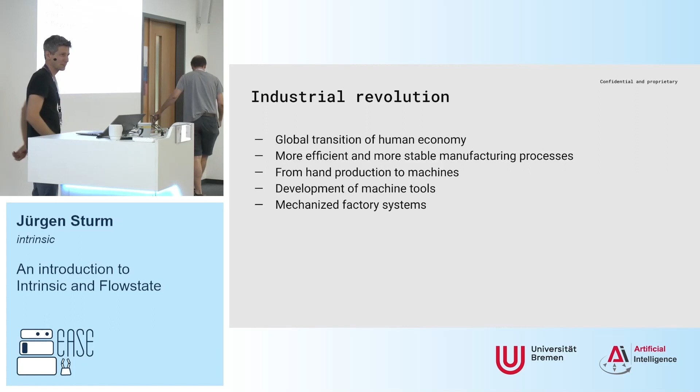Of course, this is not something that has just happened recently, but this has been going on for several centuries, and it's called the Industrial Revolution. I thought for the first few minutes we could take a deeper look at that, with the aim to understand what technological breakthroughs have enabled that, and what we can potentially learn for the next breakthrough to come.

So, of course, Industrial Revolution has happened everywhere. It is a global transformation from hand labor to machine production. But not only that—also research on manufacturing processes themselves, making them more efficient, plus the development of better tools, which made it possible to produce products at scale and at a significantly lower price, so that these products then became accessible to everyone, or to the masses.

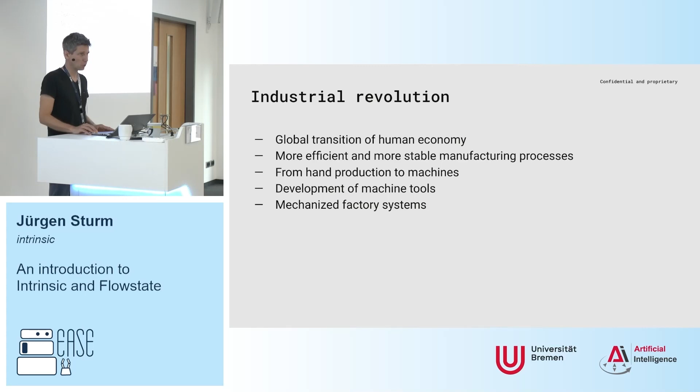And with that, manufacturing is actually, if you look at the worldwide economy, one of the big sectors of economy. There is of course also housing, food and health and so on, but manufacturing itself is actually making up for much of human economy these days.

And if you look more closely, Industrial Revolution is considered to have happened in stages, or you can identify various stages. It started all with essentially the steam engine, and suddenly having access to mechanical power that people could use to drive machines—before, everything had to be hand labor or animal labor. And that enabled, for example, that the textile industry was able to produce at scale, textiles that were very expensive before, and then made it accessible to everyone.

But also technological advancements in general, like, for example, iron production got massively cheaper during this period, which then formed the basis for the second industrial revolution, where the availability of iron and other goods enabled, and also led to, the invention of the railway in the first place. The availability of iron and other things made it possible that these things could be manufactured again at scale, so everyone could actually benefit from it.

Also, gas and water supply systems got introduced. Electrification started to happen during the second industrial revolution, and this enabled people to move between cities. And through the invention of the telegraph system, ideas were able to be quickly exchanged.

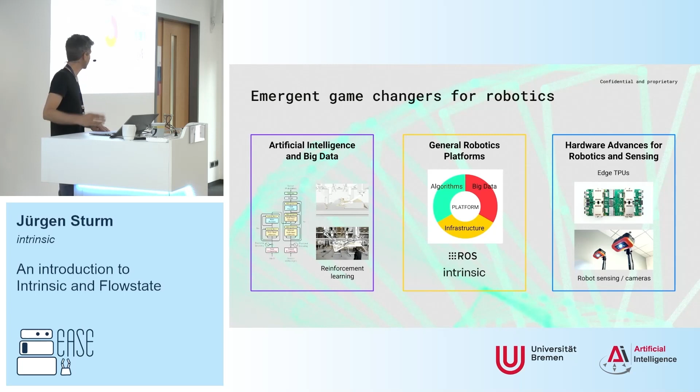And this is why Intrinsic was created with the goal to make industrial robotics better accessible for people and for businesses who previously did not have access to it, simply because of the complexity and the background knowledge that you have. You really have to distinguish this now mentally from you, because you're all robotics researchers, right? You know how to get this stuff done, but the majority of people in the production sector actually do not know. And for them, it is impossible or extremely expensive to actually make use of that.

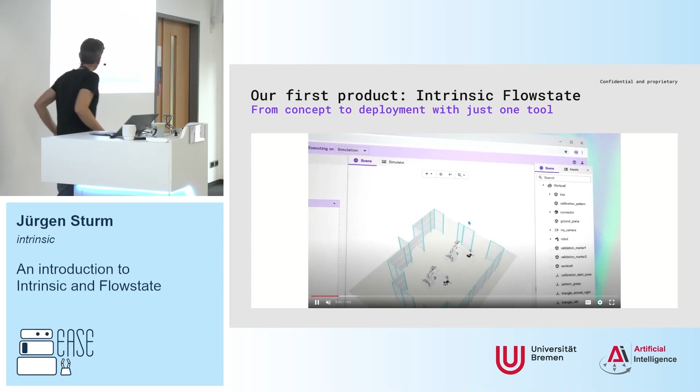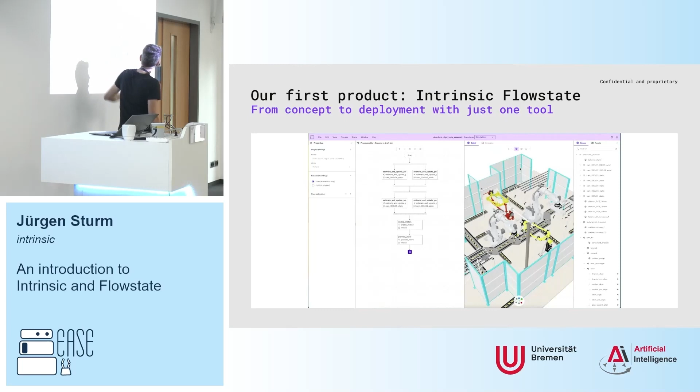Earlier this year, we introduced Intrinsic Flowstate. Flowstate is the first product that we've announced that is built on top of the Intrinsic stack. This is a web-based application that allows users - and this is really not for programmers, this is for users of robotics technology - to design a work cell in 3D. This is really about industrial static production work cells, and to program it using a graphical user interface.

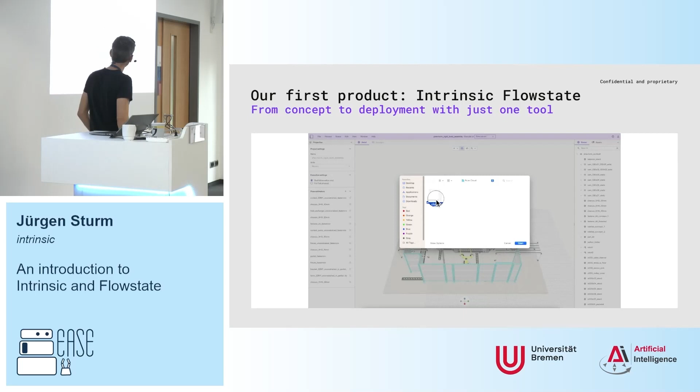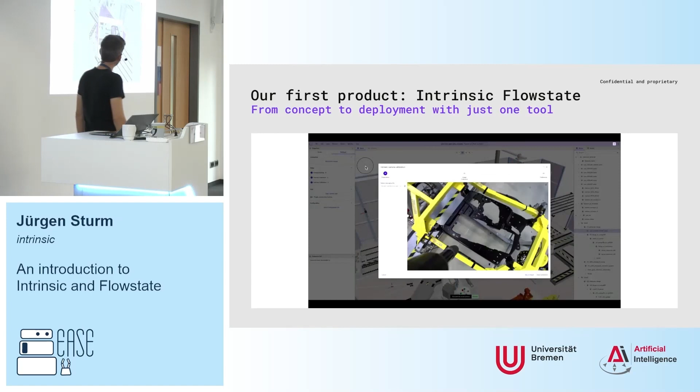And I'll show you more in the remainder of this talk of how this is put together, and how this can be used. But it's also important to keep in mind that this is just one of the outlets that you can do when you build on top of the Intrinsic stack. But we're targeting initially people who have a need for automation technology, but who are not necessarily robotics experts.

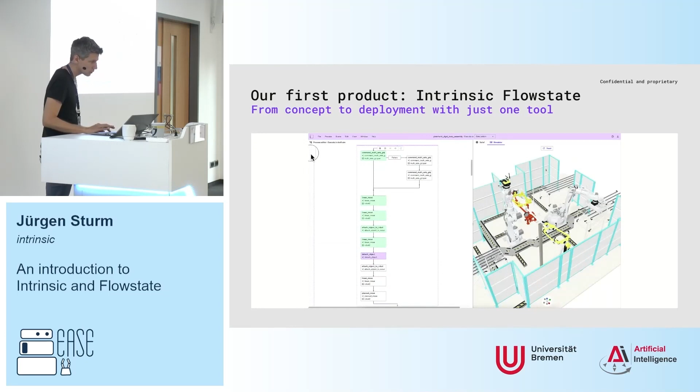Cool. So, let me continue. Good.

Our platform has different aspects that went into its design. We're really trying to build a platform for the next generation of application developers. At the moment, robotics is mostly restricted to people with a robotics background. With this platform, we're hoping to make it accessible for people who don't necessarily have that, or who have been developing other things in software engineering but not this deep robotics hardware or tech background.

Second, we're planning to make robotics and AI accessible, and this is where we believe we need your help. There are many really good algorithms that would theoretically be there, but in practice the rest of the world cannot yet use them because it's too difficult to set up, deploy, and adapt to the problem you actually have. Even if you're able to grasp a cup and put it in the dishwasher with a robot, that doesn't mean someone else with a robot who has the problem of packaging cups in a basket could actually do the same.

Third problem, I guess all of us have experienced this: making hardware, specifically robotics hardware, better interoperable. It's always a pain when you add a new sensor or piece of automation equipment to actually connect to it and use it in your application. We're building on top of existing standards, but simply by pulling it together and making this more accessible will hopefully make life easier for everyone.

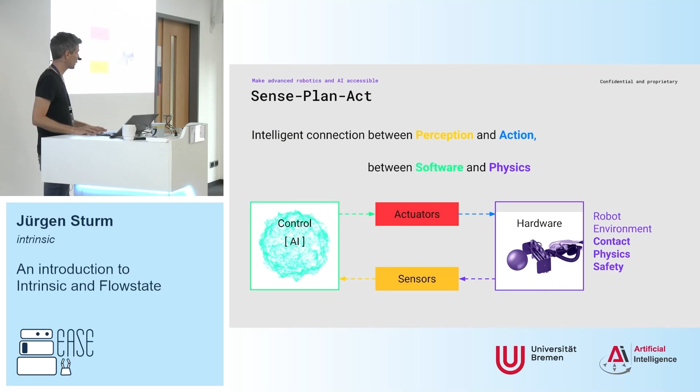We've seen this before. No matter how you think about it, typically there's this sense, plan, act loop. The skill sits on the control side, but is interacting with the hardware or potentially simulated hardware. Because it's hardware, the robot has to deal with the real environment around it. This also means it has to deal with contact situations because we want to move or change the world. Physics plays an important role, also modeling physics correctly, and of course dealing with safety problems, especially when you're putting it into production use.

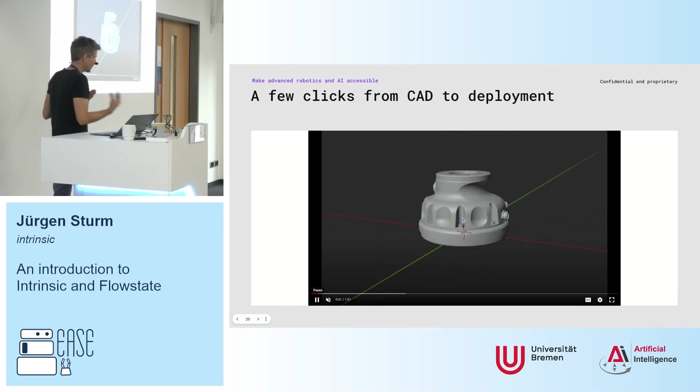Let's first look at the sensing part and one particular skill that we're shipping with: pose estimation. As I said, there are plenty of computer vision algorithms that would be suitable. This one is actually for mono RGB cameras.

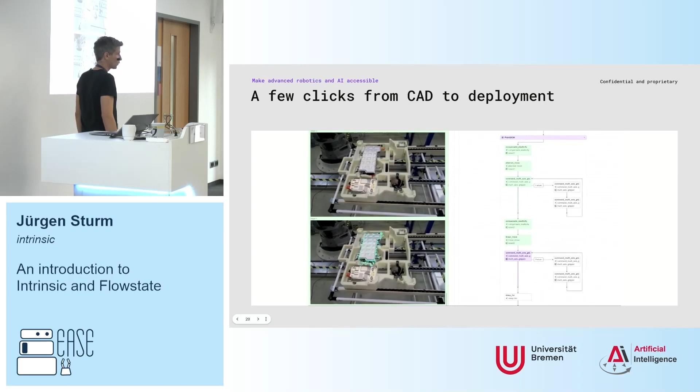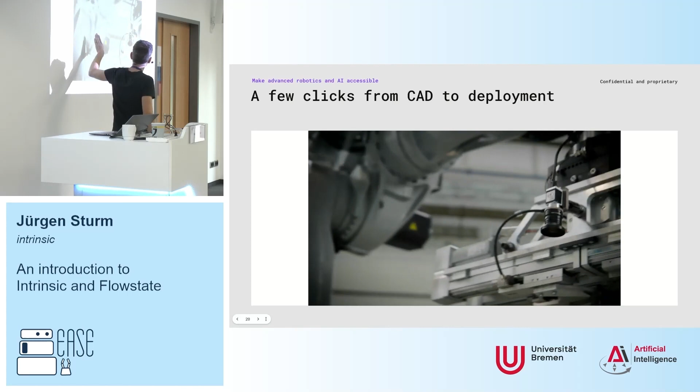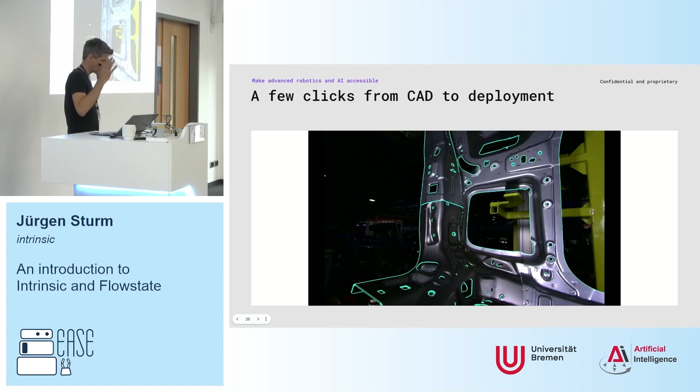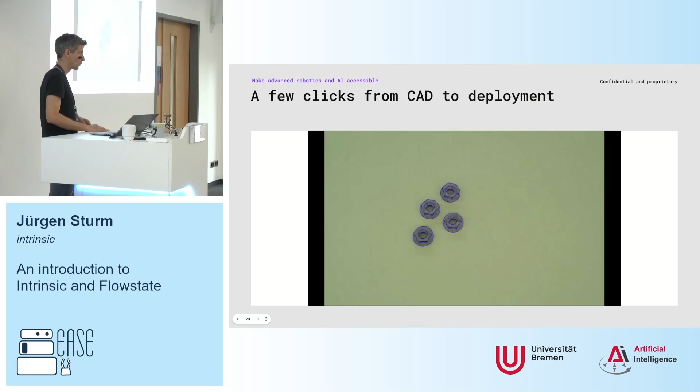The user starts with a known CAD model. In our web interface, a user can upload a CAD model of a particular part that you're interested in, that you need for your production process. We use a typical industrial camera, in this case connected through an Ethernet interface, GenICam compatible. Then in our UI, you can configure a pose estimator. You specify, for example, what the expected pose of the object is, what range of orientations you want to train your pose estimator for. You kick training off, and then it trains in the cloud or locally, depending on what algorithm you choose. Once this is ready, you can use it in your process, and you can also train multiple pose estimators depending on how many parts or situations you have.

For your use cases. Oops.

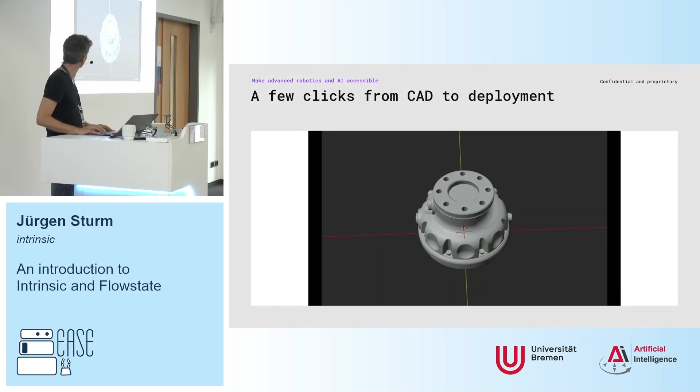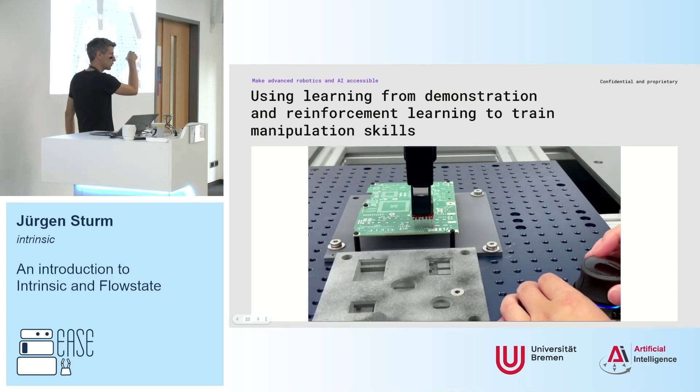So on the actuator side, here we have a use case on PCB assembly. This is a PCB board into which we want the robot to insert particular components. This is one of the things that is difficult to automate today, because this insertion you typically don't get right, even if you're using computer vision to perfectly sense the pose of the piece, because picking it up and then putting it on a PCB board, you will never exactly hit the holes. So you need some strategy for properly inserting it.

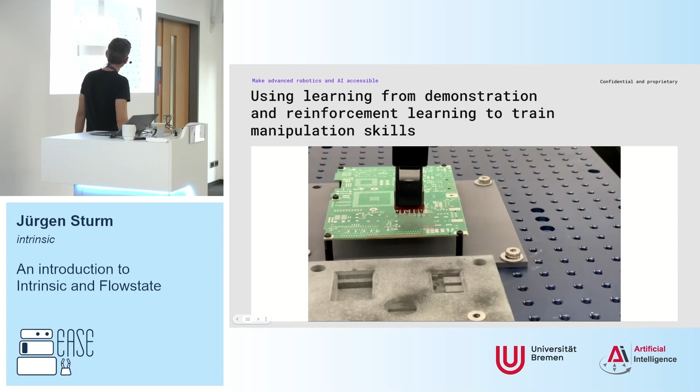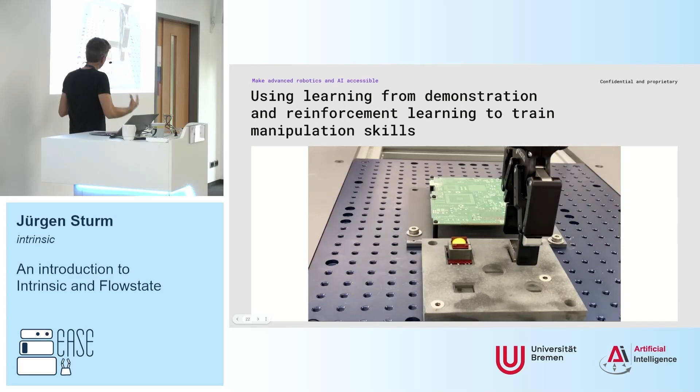The approach here is that a human is actually providing some demonstrations using a space mouse, and then the robot uses that as a starting point for reinforcement learning to actually learn a policy that has a very high likelihood of succeeding. You can see from the video that during training it may actually destroy a few PCB boards. But then once training has succeeded, the robot is very soft, gentle to the boards afterwards. Because it's packaged in a skill, this makes it easy for people who don't know about reinforcement learning to automate automation problems like that. This is something that hasn't been possible before.

Good. Then the next aspect is making hardware interoperable. For that, maybe first to start with, we call every piece of hardware a resource. So every piece of automation equipment is essentially one resource in the Intrinsic speak. A resource typically is a software service, which may correspond to a hardware driver or controller. And we already provide a number of resources, supported hardware you could say, in a catalog for particular robot manipulators, grippers, cameras and so on, but this is of course also something that will grow over time.

We also provide an extensible real-time control framework that allows you to not only have a hardware driver, but a hardware driver that is actually in a tight real-time loop with other real-time hardware drivers, like when you're dealing with robot control and a gripper, so that both of them can be synchronously used. Of course, this is not needed for every type of resource, but for two manipulators that you want to control simultaneously, you of course want to make sure that not one of them is actually hanging. This real-time control framework is using a hardware abstraction layer that allows you to integrate with existing interfaces to your hardware.

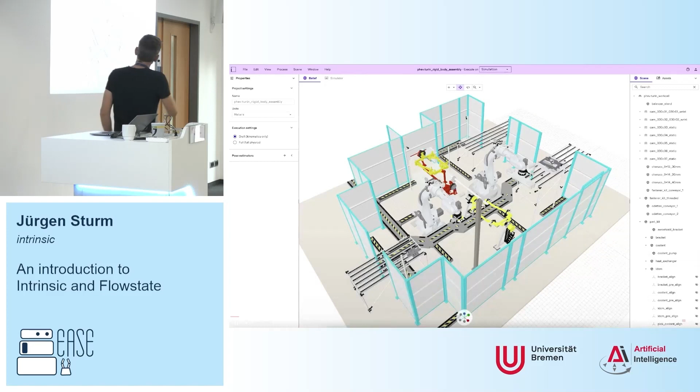If this loads... So this is the standard web interface that people see after they log in. Let's see, where is my mouse pointer? So you have the work cell design. This is already a quite elaborate work cell, as you can imagine. In the easiest case, you would just have one robot arm with a gripper on it, and on the left-hand side you see the process.

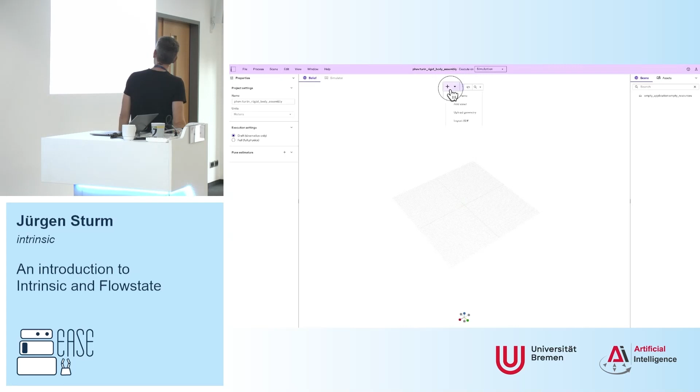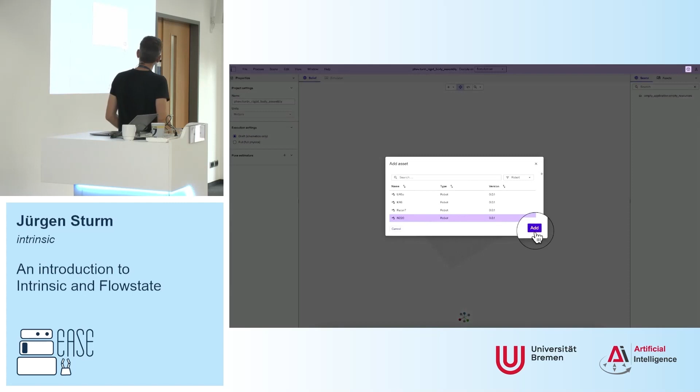Then this brings up this 3D workcell editor, where you might have initially nothing, and then you start uploading your own geometry of your workpieces or the things you want to manipulate. You add assets, which are the resources you saw earlier. You can add different types of robots, different grippers to your workcell. It's important that a resource actually brings all the parts needed for controlling it: the hardware driver, the sim driver, the geometry, and the configuration, so that it can fully work in simulation but then also on real hardware.

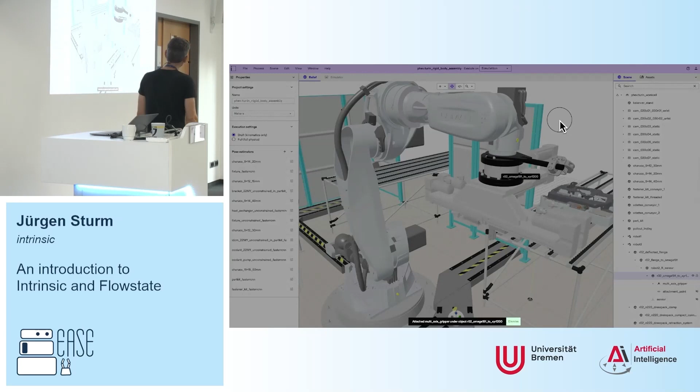Once you put everything into your scene, you have the scene tree on the right side, where you can reparent objects, drag and drop, for example, so that the gripper is mounted to the flange of the robot. So you connect all your pieces. And then when you're happy, you can actually come up with big scenes.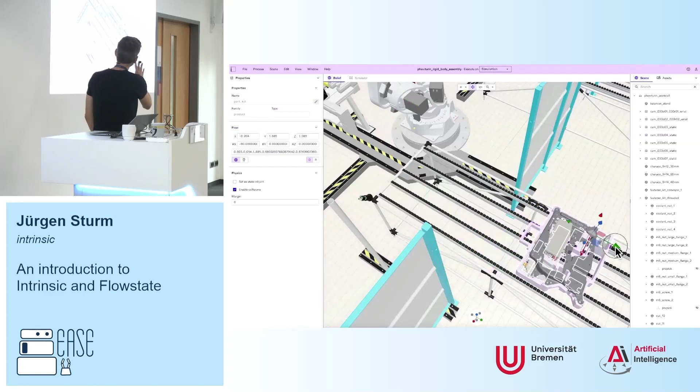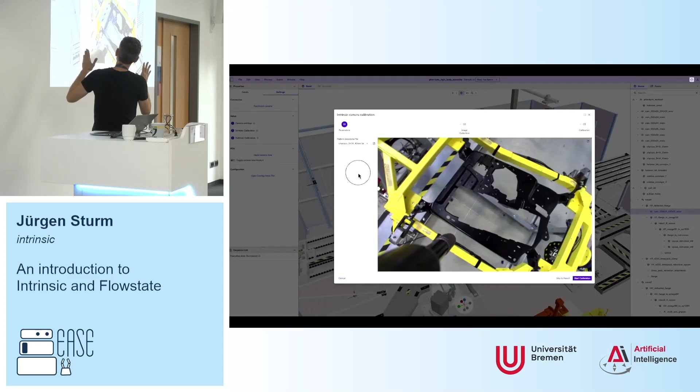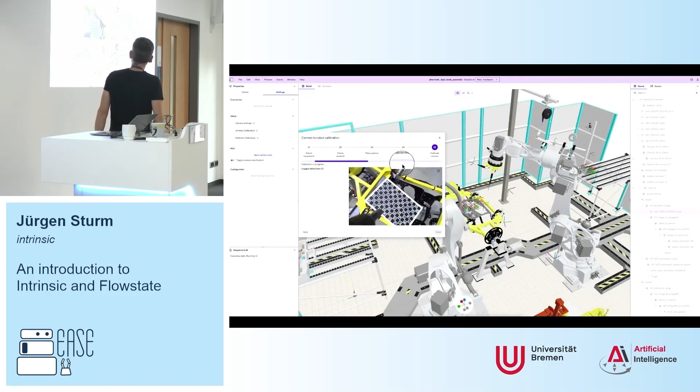Then for every piece of equipment, you can actually, on the left side, see a properties panel where you can change the configuration. For example, for a camera, you can overlay a camera frustum just to see what the camera sees. You can start camera calibration or type in the calibration parameters yourself, depending on where you're getting them from. But we do have integrated wizards for intrinsic and extrinsic calibration.

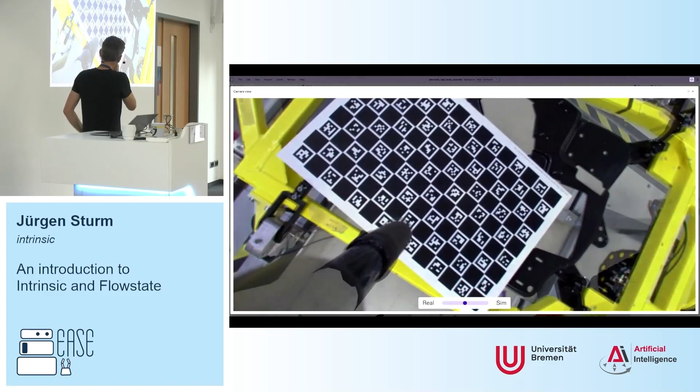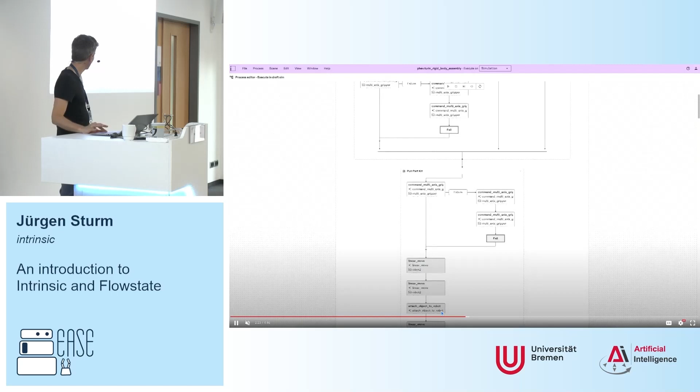Intrinsic calibration is for internal parameters, and then robot-to-camera calibration if you have a hand-mounted camera, for example, or a static camera that you want to calibrate with respect to a robot. This is super useful because I assume everyone who's worked with ROS and cameras has used this before. You get an overlay between the real world and your digital twin, so you can verify that everything is correct.

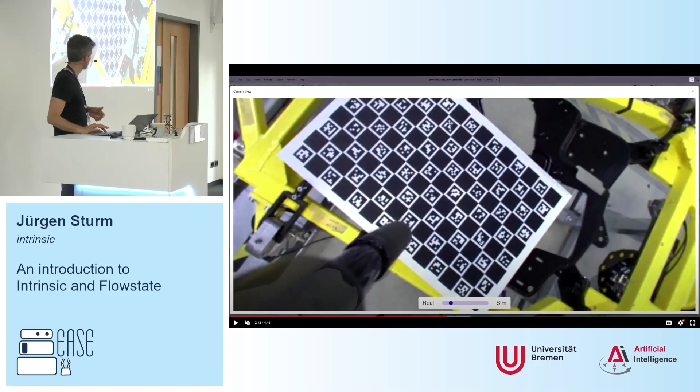Then the next part is that you have to write the program. It's actually interesting, we're using behavior trees in the back end, but we're visualizing it almost as a flow chart. The reason why we're not representing it as a flowchart is because flowcharts tend to become like spaghetti code—you can have arbitrary arrows. A behavior tree, by definition, has a certain structure. You can't suddenly jump from one node to a different node somewhere else.

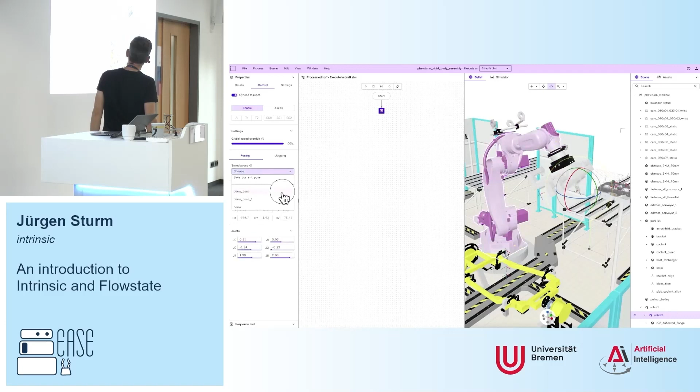You always have to go through this hierarchy of commands. From here, you add skills, you parameterize your skills, you choose, for example, on which robot or which piece of equipment you want to run this. In this case, the robot is supposed to go to a particular target frame. You select the speed, the contact force you want to achieve, and then you can run it with just one click. We also have a jogging interface so you can pose the robot and jog it.

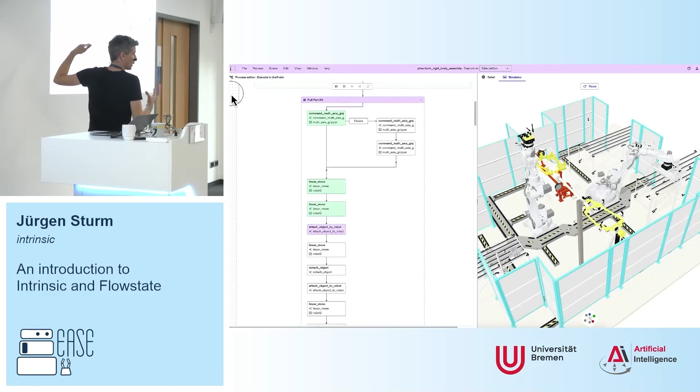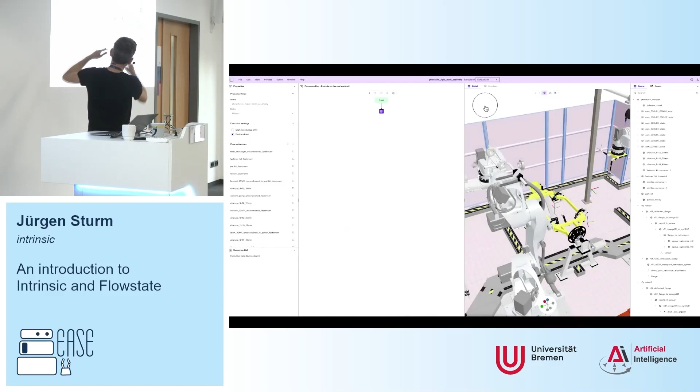There are control flow commands, for example, for adding groups, branches, parallel execution, and so on. I think such a user interface is really nice for people who don't have a programming background, for creating quickly a small process. But of course, the bigger your process gets, the more tedious this might become. From a certain complexity on, you might actually want to use a different interface, but at least for getting started, this is a great way for building something. Plus, you can structure it in groups, and in the future you'll be able to reuse certain parts of your tree, composing it from existing building blocks.

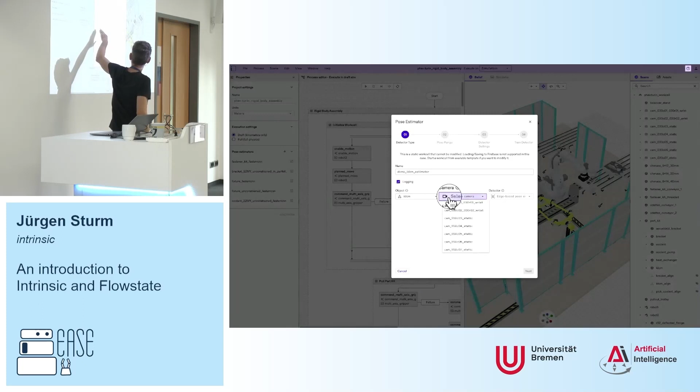This is now showing again the pose estimation. We want to detect this part here as part of the production process, and we briefly had this before. So you can create a pose estimator—you select which object you want to train for, from which camera, and what type of detector you want to train. You can specify the view range from where you're expecting to see the object.

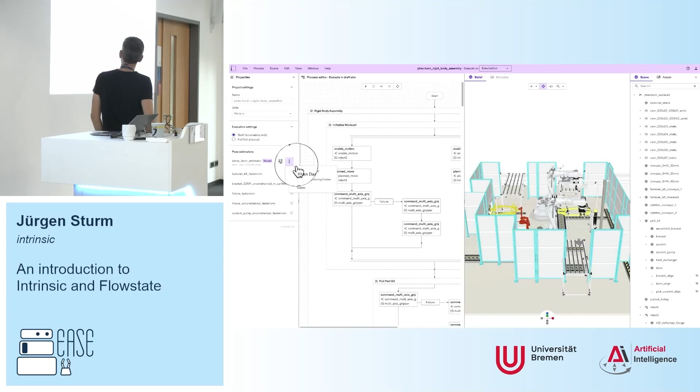You kick off training, and then it either runs on-prem or in the cloud, depending on how much GPU resources you need. And then you have a pose estimator trained for this particular object, for a particular camera, in your scene.

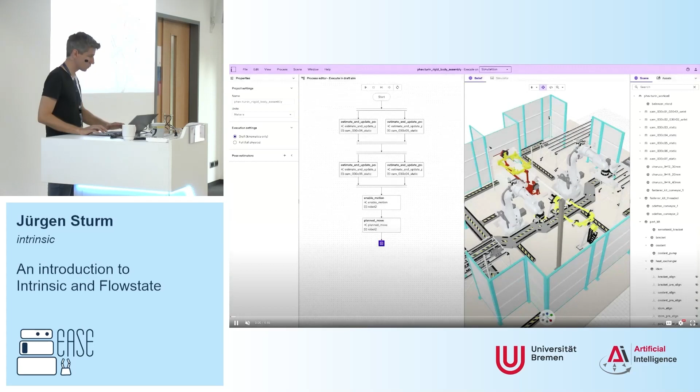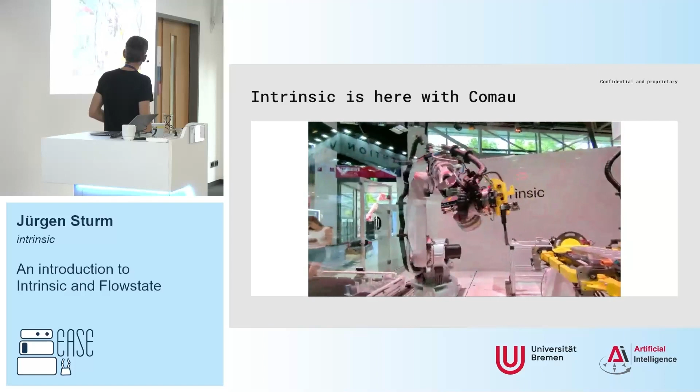At Automatica, we actually had different booths where we showed how the developer experience itself looks like, how perception works, and force-sensitive grasping. But we also had one big industry use case set up there, which is pretty amazing—you have to imagine two big robots that were assembling part of an electric vehicle. Comau is a system integrator that works with Stellantis and other automotive companies to create such production lines.

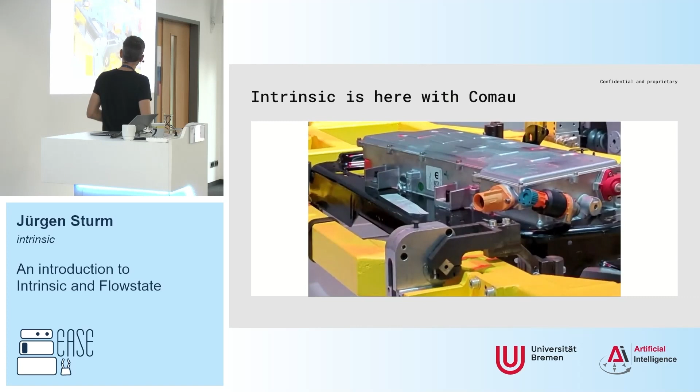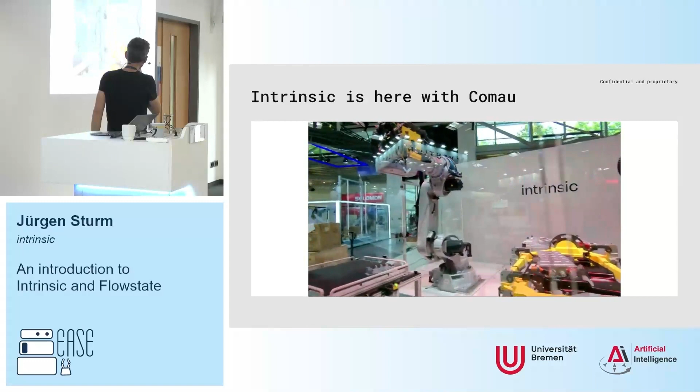This robot here is mounting essentially this electrical component on a larger metal frame, and it's doing this without fixtures. It uses pose estimation for picking up nuts and for picking up this piece, and placing it using force-sensitive guidance into the frame.

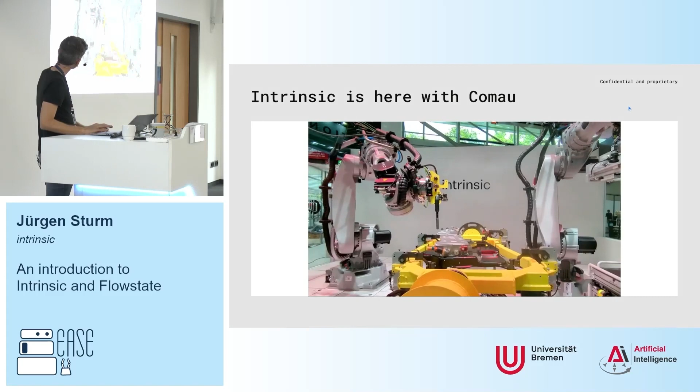So we're still in this beta phase. If you're interested, you can sign up there. Our plan is, over the next few months, to enroll more and more people. We're doing this gradually because we know the system is not finished, and we don't want to frustrate people by opening it up too quickly. But over the next few months, I assume more and more people will get access to this.

And then hopefully in the foreseeable future, this will be open to everyone who wants to use it. So, wait, how are we doing on time?

Okay, very good. So just as an outlook of other things going on at Alphabet that can or might become useful for integration with such a system, this is from DeepMind in London.

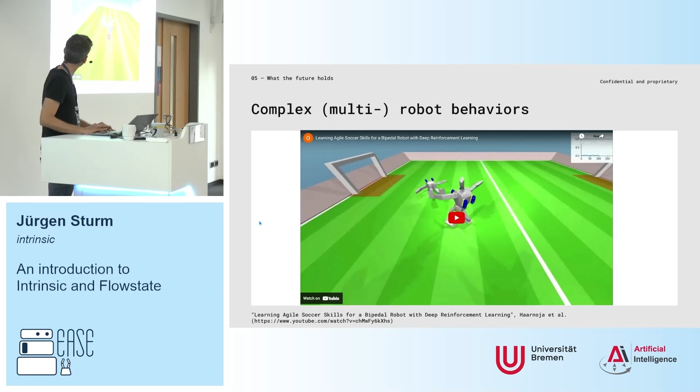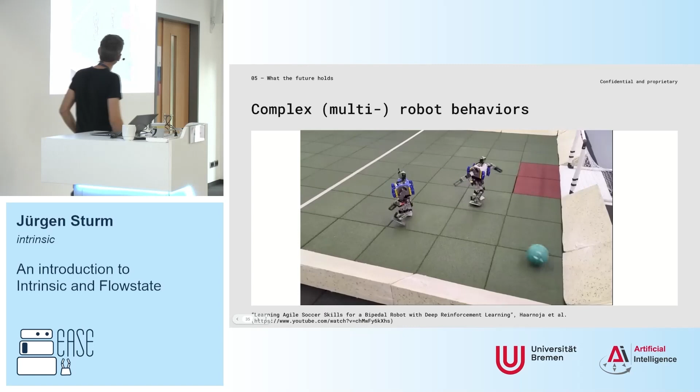Another work here is on soccer playing robots. The interesting part is that these robots completely learned walking in simulation, and you really get controllers that can surprisingly well react to disturbances. I might have to skip here in the video to a different location.

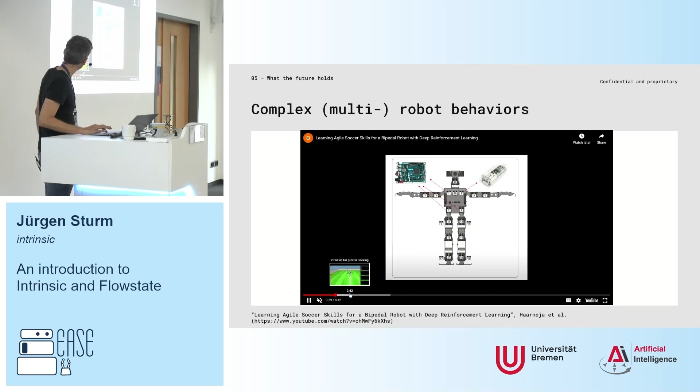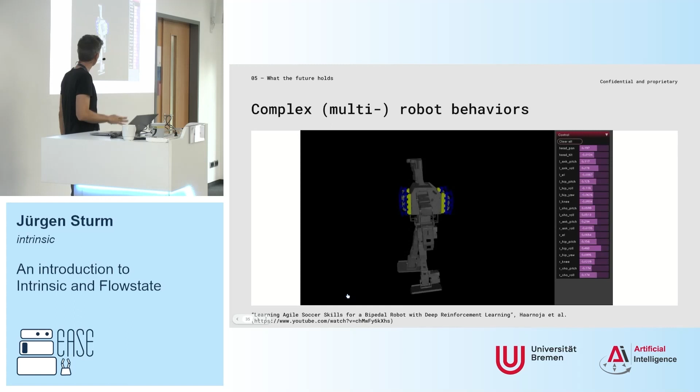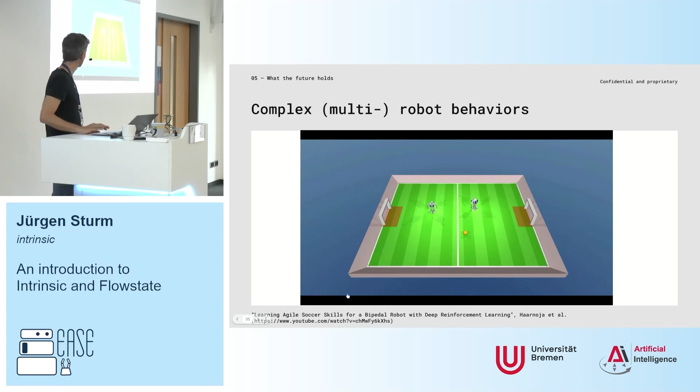So you have a really high-dimensional problem. The robots are trained initially on two tasks, namely to stand up from the ground and to score a goal. Based on these two skills, the robots actually develop this emergent behavior of being able to play soccer and get up. Because of a good physics simulation, and also disturbances in simulation that they've been trained on, they are able to reproduce this in the real world without adaptation.

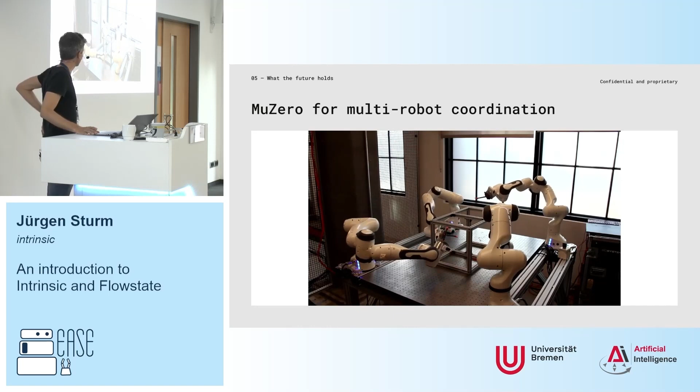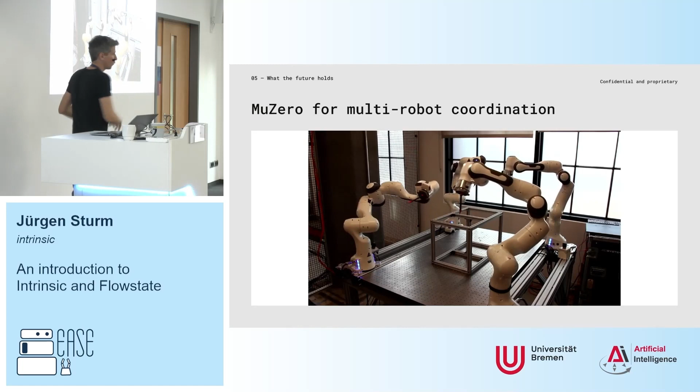And then here is another work. This happened at Intrinsic, but also together with other groups at Alphabet, on multi-robot coordination, where you have such a high-dimensional planning problem that you can't efficiently come up with the best trajectory that is collision-free. But you can train a network that, for a particular scene, is able to control these four robots in a collision-free way to reach certain welding spots.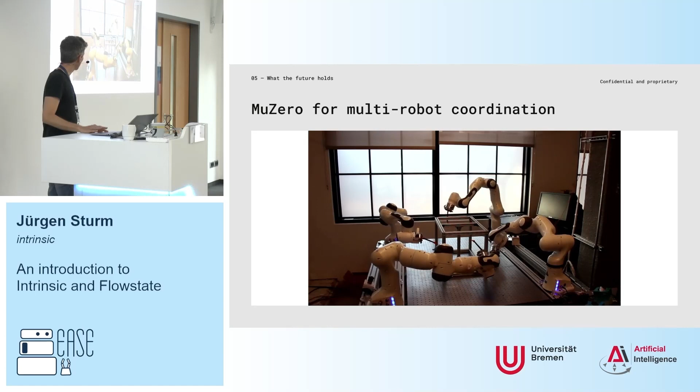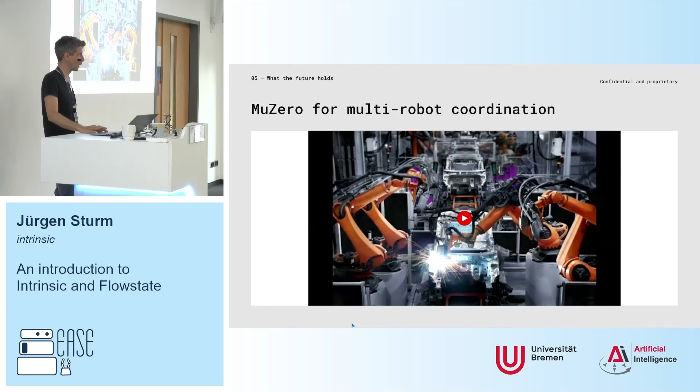Either way, the main point here is that there is enough stuff going on, both inside of Alphabet and of course everywhere else in the world, where people have developed great skills and capabilities that other people probably could benefit from if they had access to it. There is a real transfer problem, essentially, from one person who understands how to do this to another person who has the need for actually doing this. So bringing these two parties together is really a big opportunity.

Intrinsic joined forces with Open Robotics earlier this year. There's of course also interesting stuff going on, a new ROS version was released recently, as well as a new Gazebo version, and this development continues.

Good. So to summarize, you've seen the Intrinsic platform. Hopefully you got a sense for the AI capabilities that we have, but also what AI capabilities we're missing.